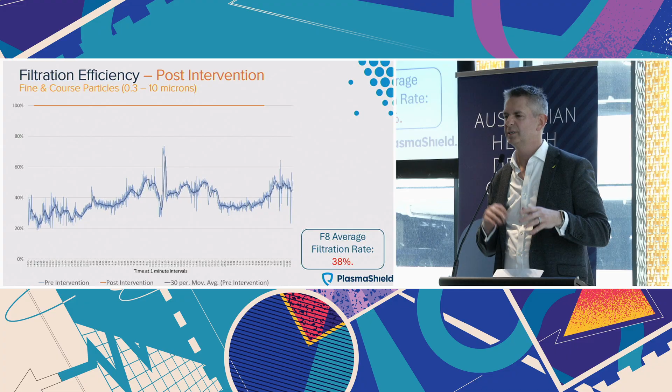People, let's talk about people. That's what we're here for. That blue line, Queensland Health Facility, that is through F8 filtration, G4 and F8. It's what is used in, let's call it 70 to 80% of the space of the hospitals that you design. Operating theatres, out here, HEPA, well established. Everything else, broadly speaking, the standards are different across the states, are between G4 and F8. They should be reducing contaminants by about 90%.

In reality, we have now done projects with Queensland Health, Liverpool Hospital in New South Wales, Adelaide Women's and Children's in South Australia, and where my colleague is in Echuca today with the VHBA. In every circumstance, we are seeing these sorts of rates. That averages out at 38%. I won't go through the detail of why that occurs. But that means, if my maths is correct, 62% of those contaminants are getting through to our patients, to our staff.

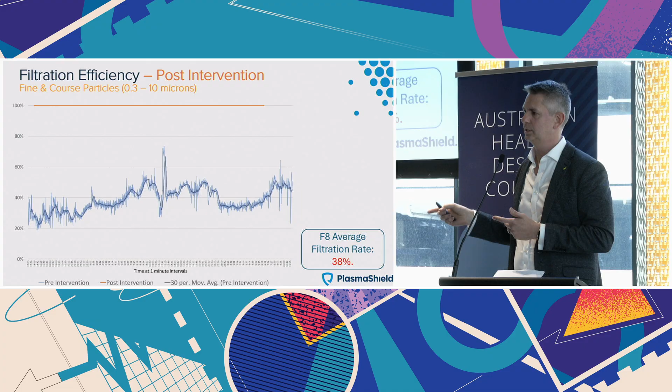The HEPA standard, actually above the HEPA standard, is the orange line. That's the result that was actually achieved at Queensland Health. And I'm from the Territory. That looks like bullshit. It looks like I've just taken an orange texter, right? So let's zoom in. That's a real data set.

Yeah, this is UniSA data as opposed to, University of Adelaide. That's a criminal offence saying that. University of Adelaide data, not our own.

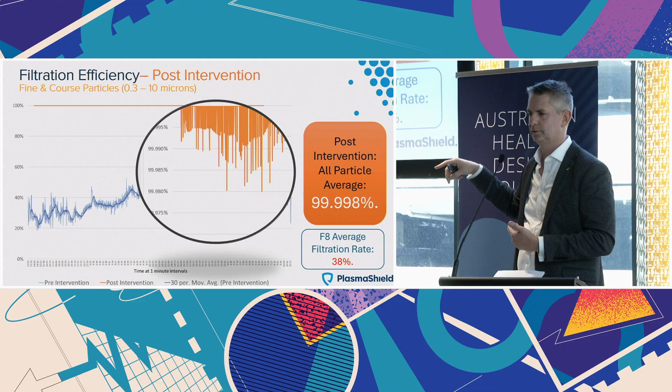But the key here is, let's ask ourselves, do we want our nurses and our doctors in that environment with the orange? Or do we want it with the blue? Do you want your kids in the blue or the orange? Do we want, most of us are of a certain age, our elderly parents in an air environment with the orange or the blue? That choice is in front of us. It's actually quite a straightforward choice, I think.

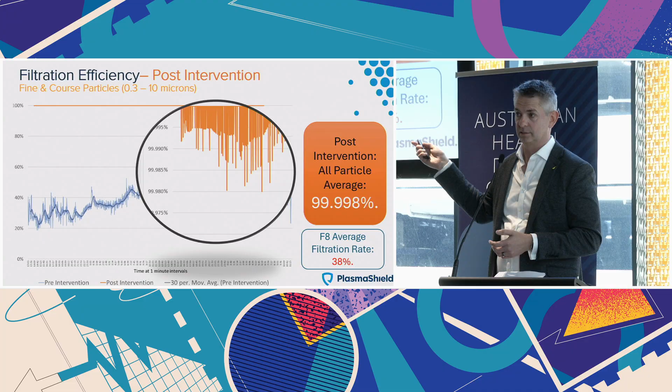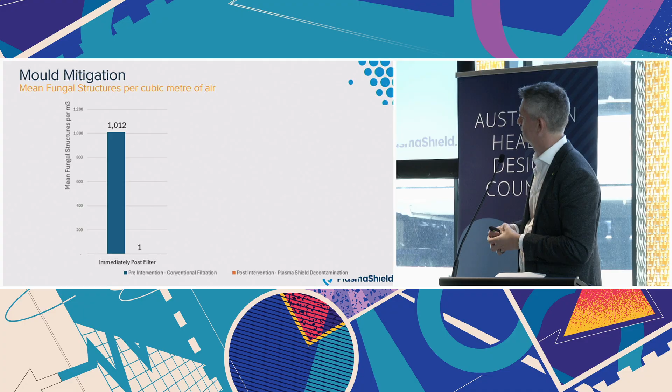So Queensland Health, when they approached us, didn't really have this as their goal. They care. When I have conversations with different states, Queensland, Territory talk to me about mould. So let's have a look at what happened with mould. The existing G4s and F8s had 1,012 mean fungal structures. We can have a conversation outside about what mean fungal structures mean. But every cubic metre of air had 1,012 mean fungal structures in it. Independent data, not our data. We got that down. We took out the F8s. We put our devices in. We got it down to 1.

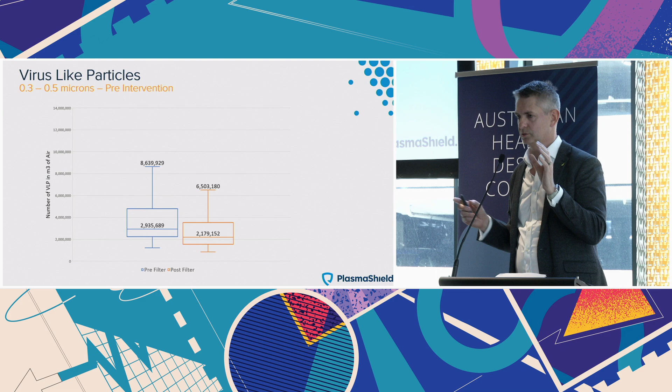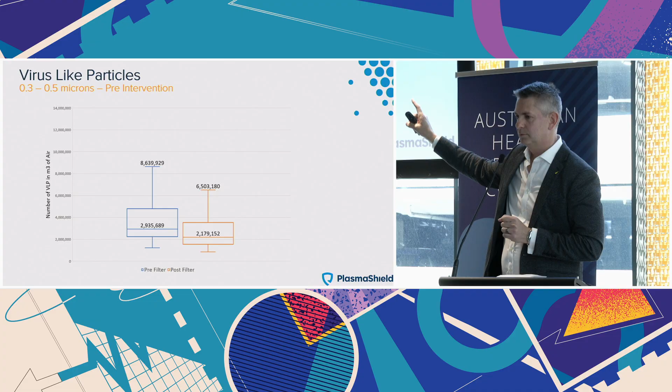Let's talk about viruses. When we talk about viruses, they're remarkably difficult to capture in the air. It's just a scientific fact, ridiculously expensive. So academics use virus-like particles between 0.3 and 0.5 microns, just very, very small. Think about it like that. This is in the blue, pre-filter F8, in the orange, post-filter F8. 8.6 down to 6.5 million. It's not a bad job. They're pretty small particles. When we tested, it was 13 million before our device. We got it down to 707.

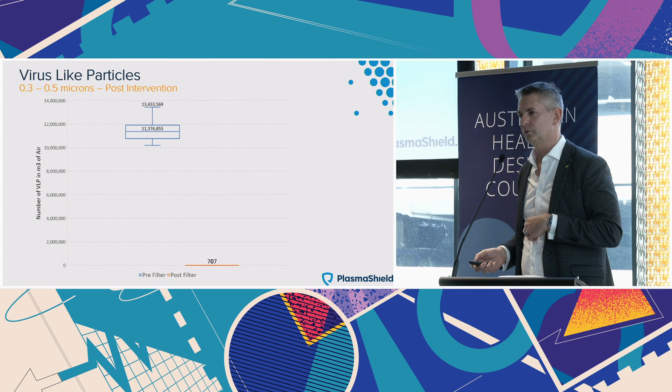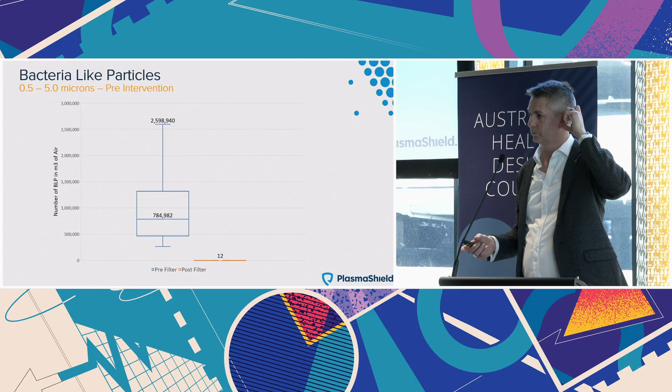The conversation is about what we want our air to be like. The biggest disadvantage of working in the industry in which I deal with is you can't see this. You can see it in data when we present it after the fact. Let's play a quick game. We've got our particle counter out there. We've got our device out there. How many particles in the air, in every cubic metre of air? Just someone shout out a number. How many particles? We'll go with 1 million. Put your hand up for 1 million. 2 million. 5 million.

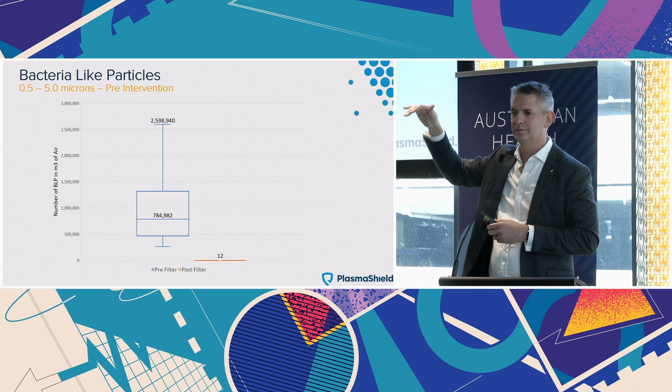Some for 5 million, 10 million, a couple at 10 million, 15 million, 20 million, 25 million. Sir in the brown jacket, 25 million. So there's 25 million particles in the cubic metre in front of me right now, possibly. It was pretty crowded back there, maybe a little bit less. Not all of those are infectious. I'm not trying to scare people.

Some are. And if we go back to the environments that we're creating, the operating theatres are fine. I'm sure they can be improved, but they're fine from an indoor air quality point of view. But fundamentally, if I'm an oncology patient, if I'm a dialysis patient, anyone who's got cancer in their family has lived through this, severely immunocompromised, and in our hospitals, you'll never guess this, there are some pretty sick people. So they are coughing and spluttering and talking and putting these particles out. So again, I ask you, blue line or orange line, which would you prefer to design for?

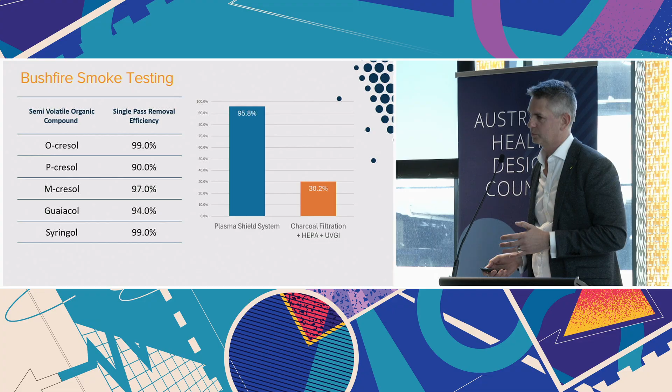Okay, Victorians, they don't care about mould. South Australians don't care about mould. They do care about bushfire smoke. So another peer-reviewed article. Gas phase odours don't have particles. Smoke's a bit different. It's tiny. It'll go straight through HEPA because the particles are very, very small, smaller than the 0.3. But also they'll be gas phase. By that I mean they're like methane or CO2. They don't have a physical substrate to them.

So they tested on odours, and we did not expect this result. We're very proud of it. We're effectively 3 times more effective for bushfire smoke. The Victorians are desperate to understand this. They have pulled money out of their pocket and they're putting us into a regional asset to test this. Because you are hospitals, you will bring in outside air.

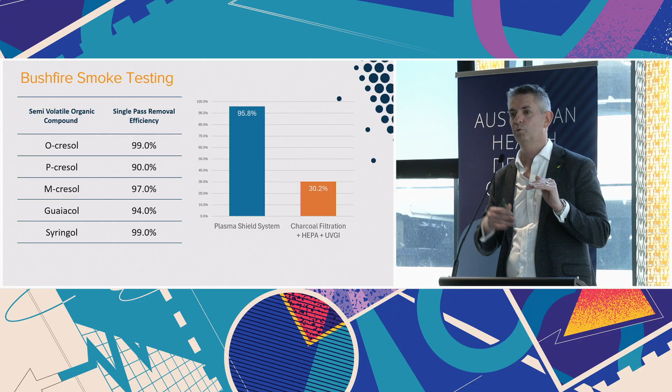No one's trying to reduce the amount below the minimum. But that minimum, in a regional context, in New South Wales, in Victoria, in Canberra, in South Australia, it's going to have bushfire smoke, whether it be burn-off or whether it be an actual bushfire event. So we need to design this from a resilience perspective. I won't take you through the odours, but we get rid of all that.

I'm sure you're all sitting there going, does he know we're architects rather than engineers? So let's bring it back to the one thing you can do. This is the engineering world, there's no question. I'm not suggesting you become experts in this subject matter, but I do encourage you to include this in your brief. You can get your phones out and take a photo if you like. We've got an expanded version if you come to the desk around the corner.

But really all you need to ask, Mr. or Mrs. Engineer, is to say, the design team is requested to assess and present options for enhancing airborne infection control in accordance with emerging international best practice, including the principles of ASHRAE Standard 241. It's really straightforward to do.

I started with budgets and people-centred design. I think so much of this game is mindset, how we approach problems and how we approach new solutions and how we get them embedded into things like the AusHFGs, the CIRs in Queensland, the VHBA and the New South Wales HI. Ladies and gentlemen, thank you very much.